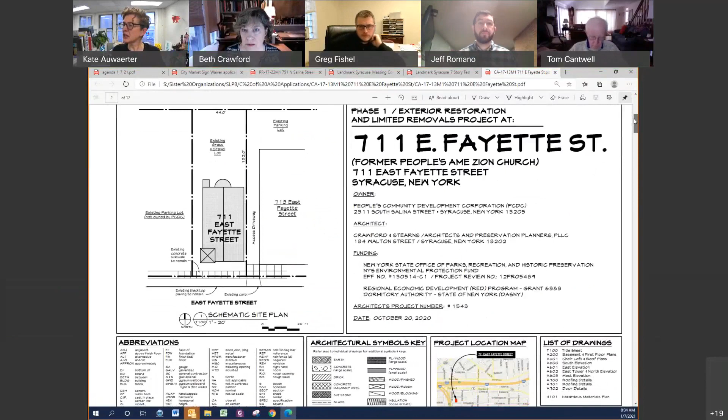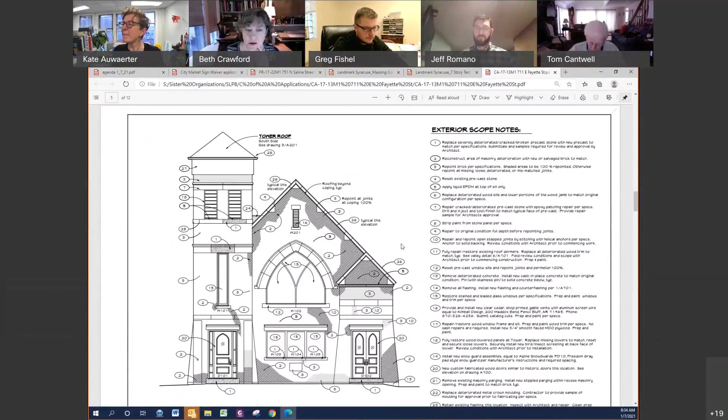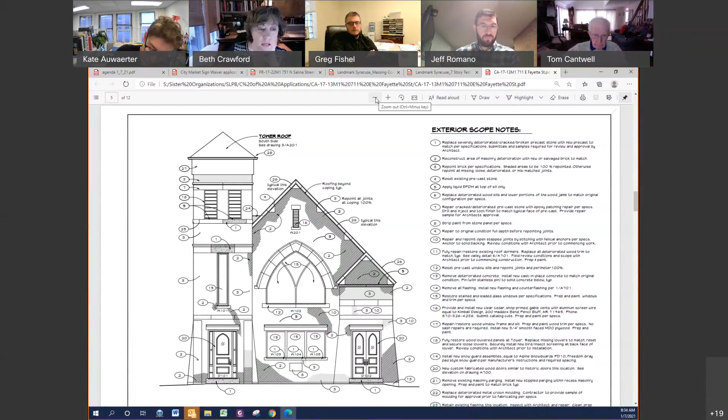So Kate, if you want to scroll down just to A600, which is the front elevation. So this is the front elevation of the building. This is a Charles Colton 1910 structure. One of the things that we did was make a modification to the roofing on the east side of the tower. So we're looking at an area at the intersection of the tower and the roof. There's a number 29 right there.

Then Kate, if you were to scroll to A602. There's a section on the left side of the drawing that shows the modification on the east side of the tower, which is somewhat obscured by the front gable. This is a problem at the building with severe water damage. Basically, the roof slopes down into the tower. It's just a really terrible original design.

So our proposed change on this is to shorten the masonry openings for the tower louvers and get all the water to basically run north and then back down around the side of the tower and off the side of the building. Right now there's a tree growing out of the area on the east side of the tower, and there's severe water damage in the tower due to this kind of just bad design.

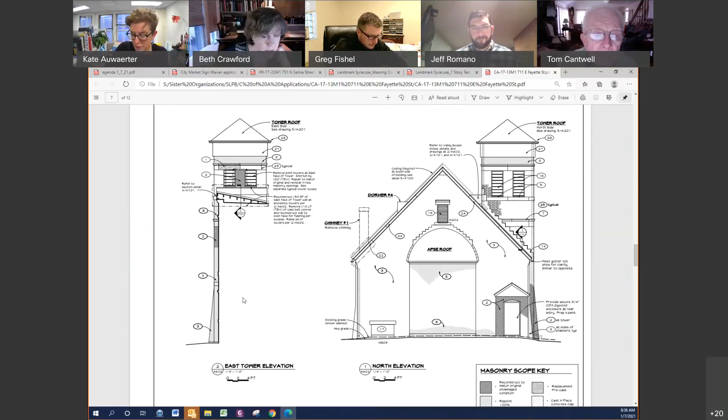So the first modification that is a change from the previous drawings that LPB approved is shortening the masonry openings and creating this new kind of valley at this location with appropriate flashing at the roof there and at the east side of the tower. And then the other modification is on A700, Kate. Okay.

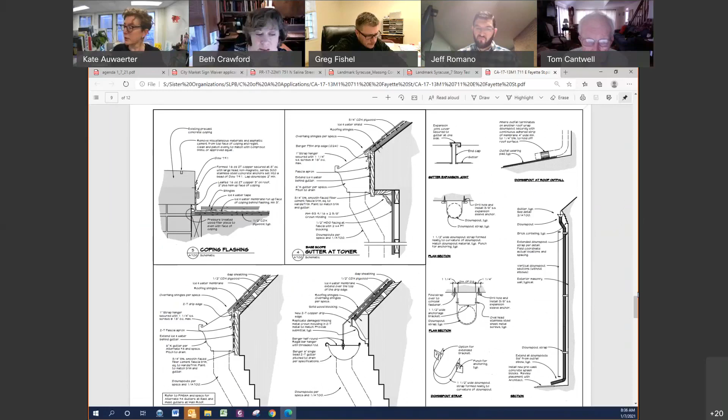So if you look at the far right side of the drawing, you'll see a pretty standard half-round gutter shown. If you look at the middle detail of 2A700, that shows the approximate historic condition with a metal crown molding on the building. The metal crown molding on the east and west side is pretty deteriorated. It exists fairly intact on the north gable.

The original proposal was to do half-round gutters on the building like this. They're fairly large, 6-inch. So this is the middle detail, 2A700, which is what the board approved previously.

I wanted a solution that would be stronger and a better solution for the church. I really felt that with the slope of the roof, this half-round gutter with snow and ice in Syracuse was not a good solution for long-term maintenance here. So I proposed this rather large K gutter. It's a 6-inch K gutter.

The crown molding on the K gutter actually emulates the metal of the crown molding on the 1910 building.

We have submitted this to the State Historic Preservation Office for review because this is an EPF project grant. They also have some other state money in the project, and all the work that I am proposing to LPB has been approved by the SHPO.

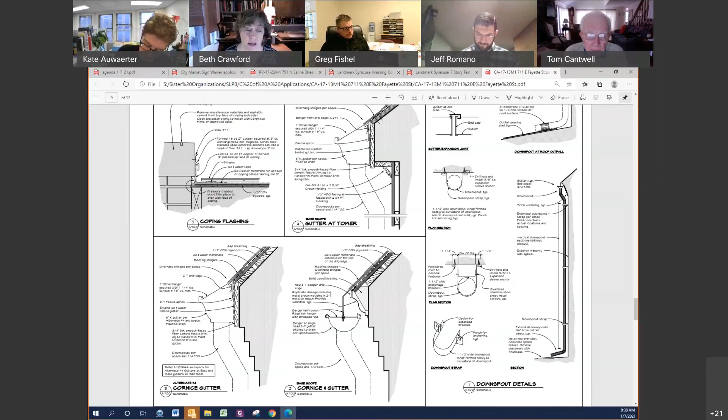I think those are the two main changes. I will note, however, that the bids came in higher than the owner's budget. We are currently working with Richard Gardner to come up with a budget that meets the owner's needs. We're working with Gene Egenhofer at State Parks to figure out both the MWBE and the meeting budget.

The work that is in these drawings, not all of it may be accomplished this year, but it is the owner's intent that it will be accomplished. They are looking at other grant applications. There's a grant application due next Friday for some National Trust money that they may be eligible for through some civil rights funding that the trust has available.

I think that's all for me. Okay, great. Does anybody have any question or comment? Any board members?

Thank you, Beth. This is a great project. I'm glad you're continuing on. I hope the budgets can be resolved. A small suggestion on my part regarding the tower flashing that is new that you described first.

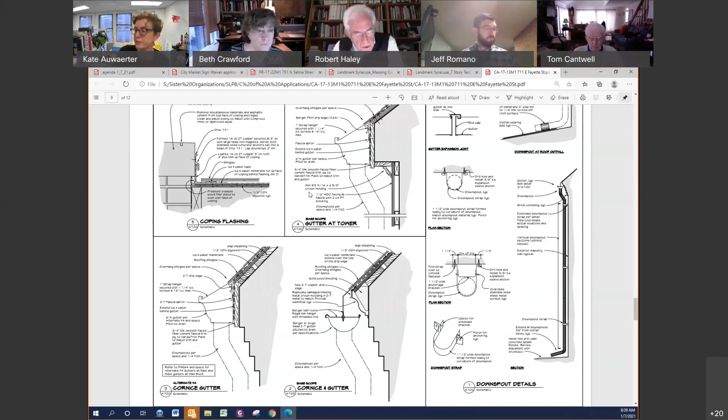Could the flat fascia of the triangle wedge be moved back to the inside edge of the masonry wall, still sitting on that, but move it back 6 or 7 inches so that it's not right on the face of the front roof.

Right, we do have it slightly recessed, and the intent was that it would actually be a dark finish so that it kind of disappears. But I will take it into consideration.

I think that is definitely a field condition once we can get up there. We were up there in a bucket about 2 years ago. I think you're right.

I would just suggest that it would be as least detrimental as possible if you moved it all the way to the inside edge, even the flashing not coming farther forward on the face of the brick, unless the field condition required differently. Move it back as far as you can on that masonry wall would be helpful.

Yeah, I see what you're saying. I understand. And once we get everything up there and removed, we can make some determinations.

Okay, thank you. Bob, can I just clarify? I'm still on the screen here. Are you talking about here, if you can see my cursor, are you talking about moving this back, or is it the?

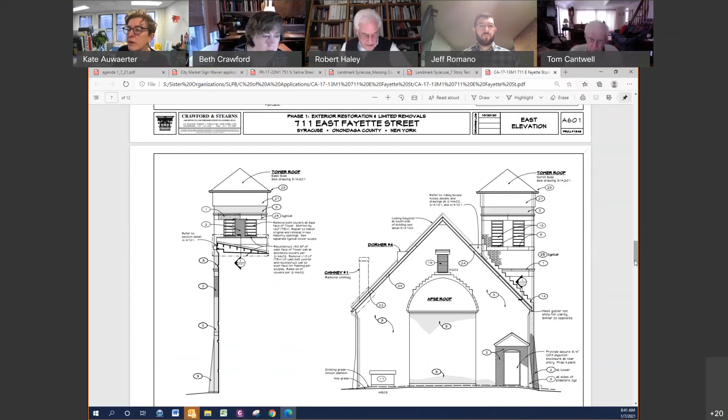I don't see your cursor, but it's regarding the detail on A602, detail 2, and the blow up detail is A701. All I'm suggesting is on that detail, on sheet A701, lower left-hand corner. There you go.

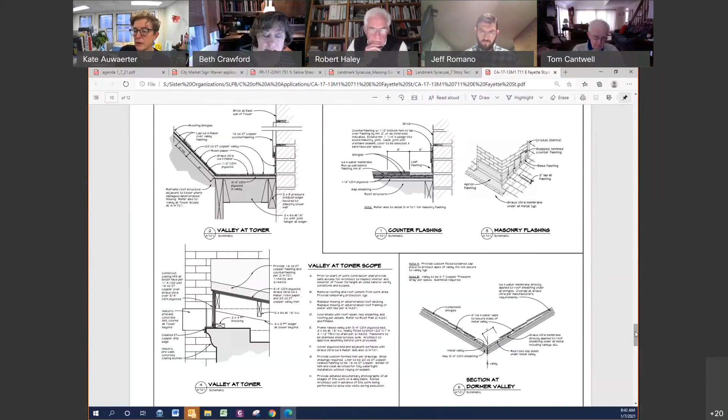Thank you. And if we can just go back to A600 again, where we started. You can actually see, approximately on note 29 next to the tower, this strange triangle shaped area. So it's perhaps smaller than we all think it is.

But we definitely need to look at that when we can get up there. Okay, that's great. If there's no other comments, I'd like a motion to approve.

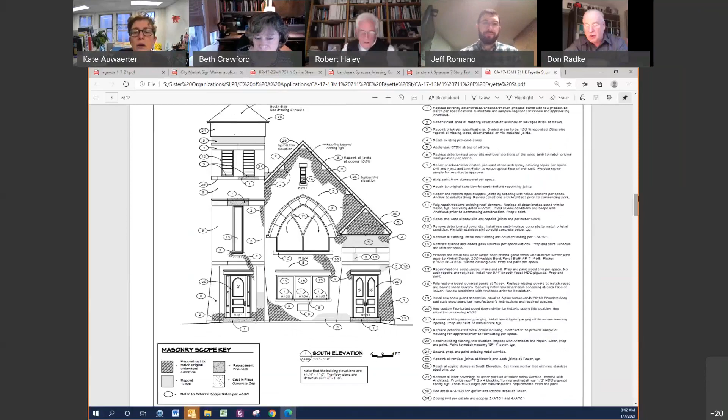Well, just one quick question, if I could. I wonder, tell us about the lintels, how you handle that, since they're a substantial part of the renovation. What are you doing there? Are you on the window lintels? Are they all new as I read, or didn't I read that correctly?

No, they're not all new. So this is a product called Onondaga litholite, and the board have come across this before. This is a very early kind of precast material that was actually made in the Syracuse area.

So on the windows, such as on the east elevation, your number one notes are replacing? Yes. Okay, so you've got brick shoring and then a new lintel, and that blends in flush with the face pretty much as the original condition?

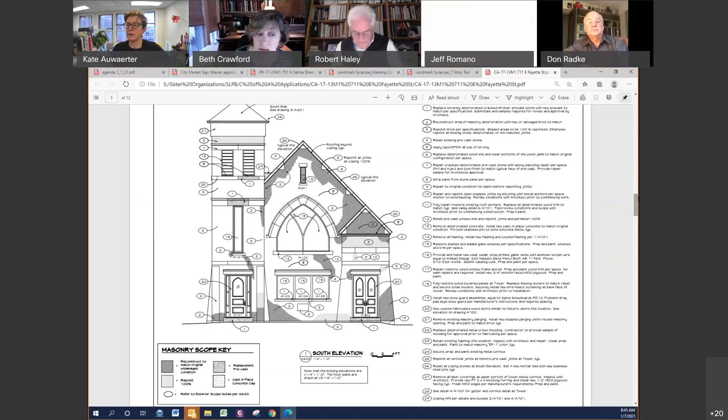At this point, we may focus as much of our efforts on the front of the building as a demonstration project. So we really want to get the roof on, get the flashing done, and then do the front facade.

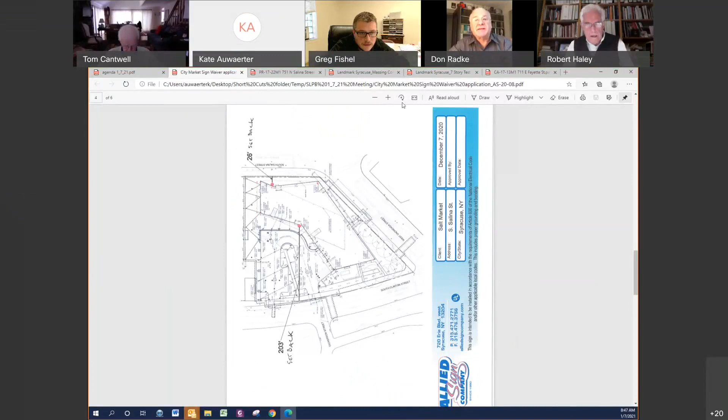I'll start with the slide. Here we go. I would ask everybody that if you're going to be rustling papers and turning them over, please mute yourself until you need to say something, because it's distracting. All right, Greg, I've started with a site plan. If you want to go to a different one, let me know.

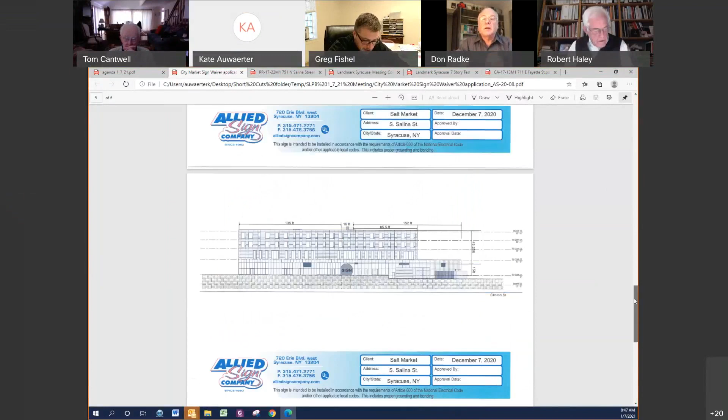Okay, so if we go to the diagram of the sign, what they're proposing is two signs here that are 15 feet tall by 16 feet wide. This would be a flat aluminum face where the letters are routed and backed with acrylic. It would be internally LED illuminated. This would be about a half-inch standoff where it would be halo lit.

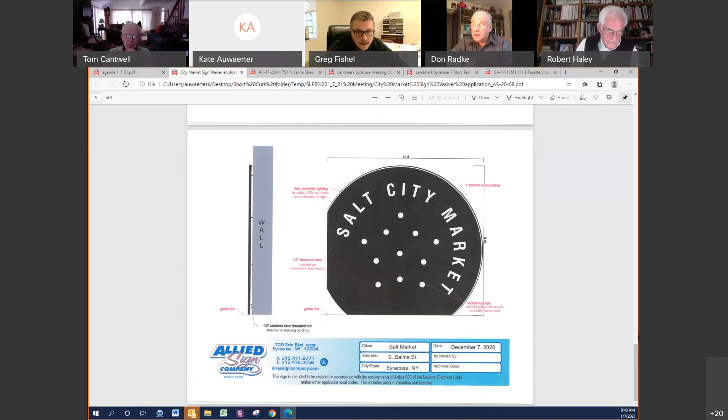So it's not glare lighting in your face. It's very subtle - the letters and these circles would light up and it would have a halo effect. These would be at each entrance on the map. I believe they're the entrance to the building, to the right of each one.

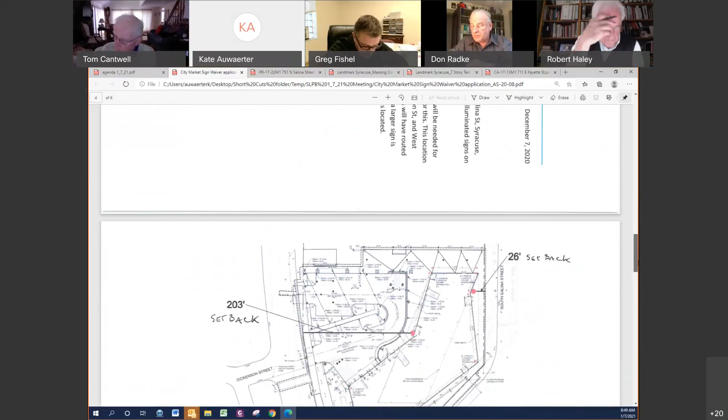I know it's kind of a modern looking building. They wanted to keep it low-key because it is in a historic district. These are pretty simple signs, black and white, very low illumination.

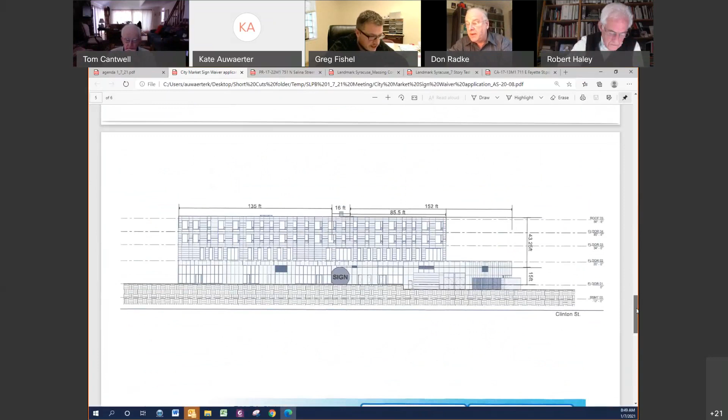Are there two signs or three? I'm a little confused looking at the site plan. There's two signs. One is on the south corner side of South Salina Street and West Onondaga. If you see the circles on the map here, that's where the two signs would be.

Do you see them on the site plan? Yeah, they're in red. So they're tucked pretty close to the building. Is that correct? How close are they to the wall?

They would be on the wall, but set off maybe a half inch to an inch to allow for the mounting. So these are actually applied to the building, not freestanding, not ground signs. They're wall signs.

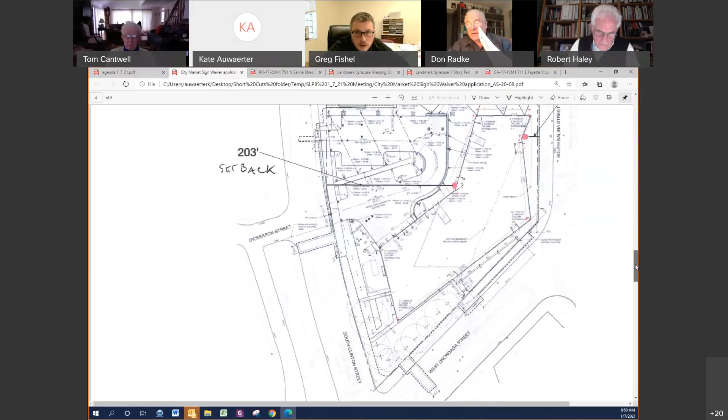Do you have any drawings? I just wanted to see what it was going to look like on the building. So they'd sit on the ground but be attached to the wall of the building. Okay, that makes sense.

Again, our jurisdiction is to comment. Are there any other questions or comments? Yes, I have some. Thank you.

Are there any other signs anticipated for the facade of this building? I don't believe so, that I know of for this building.

This is Maarten Jacobs, sorry I'm not on video. I'm the ownership of the building. Good to see many of you. There will not be any additional signage on the facade of the building, I want to clarify 100%. Thank you, Maarten, and your team.

I appreciate that, because commercial buildings with multiple tenants, that's what we're worried about here, the chaos that happens. We are trying to promote, for future new projects, a policy that deals with primary building signage naming as well as commercial signage, all part of the original design guidelines, so that it helps us approve individual applications.

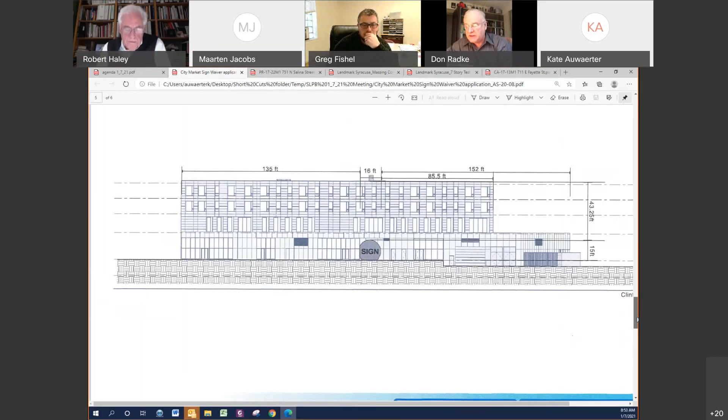Okay, so my understanding — let me flip this — I believe the issue here is that it's not the number, it's the size of the sign. So that is why they need the variance requirement, because of the size, not because of the number of signs being proposed.

That's all I can tell you. I believe the actual sign requirement that is allowed — this is larger, but not by a large amount. You know, I haven't seen the calculations for that.

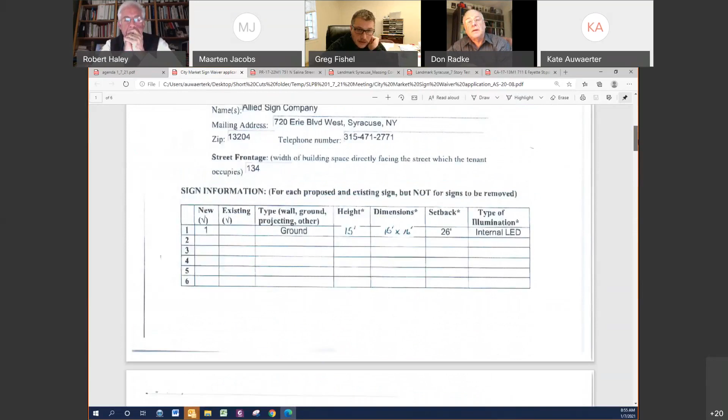I don't know if Greg can speak to that in terms of how much over these signs are over the limit.

On this discussion, I'd like to add these thoughts to the application. One is to document exactly how many square feet are in these two signs. And secondly, you just said roughly, what did you say, 25 square feet or something?

No, on the South Salina Street side, they have about 203.5 linear feet, and on the other side, 152 linear feet. What I'm getting at is it would be good for an application like this to identify the square feet of sign being requested and the square footage of signage allowable by the ordinance.

So we'd know the degree of change in granting the variance. That would be our recommendation. Yeah, that's something I should be able to provide you.

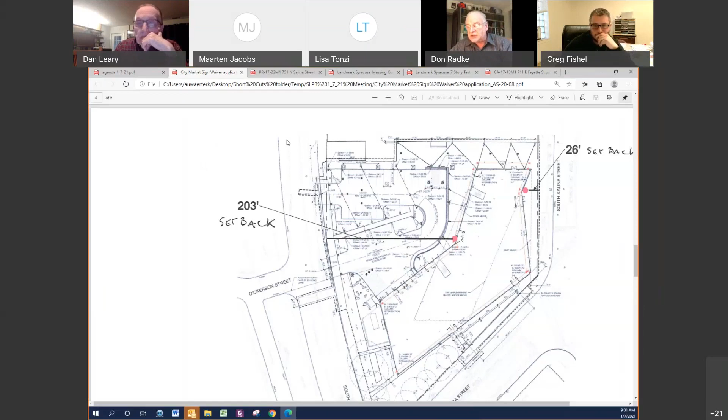Okay, moving on. Project site review, PR-17-22M1, 751 North Salina Street. Is the applicant here? Yes, I am. Michael Garrity, the architect.

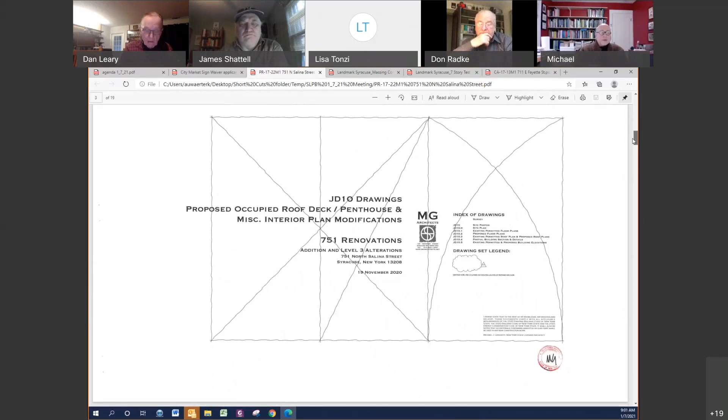Jim, floor is yours. Again, for the board, our jurisdiction here is to comment. What we've done is this building is under construction and nearing completion from a previous permit application issued about 2 years ago. At this time, for the front second floor apartment, we'd like that residential tenant to have an occupied roof deck at the rear of the building.

We have a 2-story, or 2-level, exterior porch structure from the original building permit, and that's been completed. It's a galvanized steel structure because, by building code, we couldn't do it in wood due to its adjacency to the property lines.

We're hoping to get our certificate of occupancy at the end of February so the base building structure is completed and approved. James Shattell, the owner, has an end-of-February deadline with the land bank to complete the project, which he purchased from the land bank. After that's achieved and spring comes along so we can work outside on the roof, we'd like to make the modifications to give that residential tenant a roof deck.

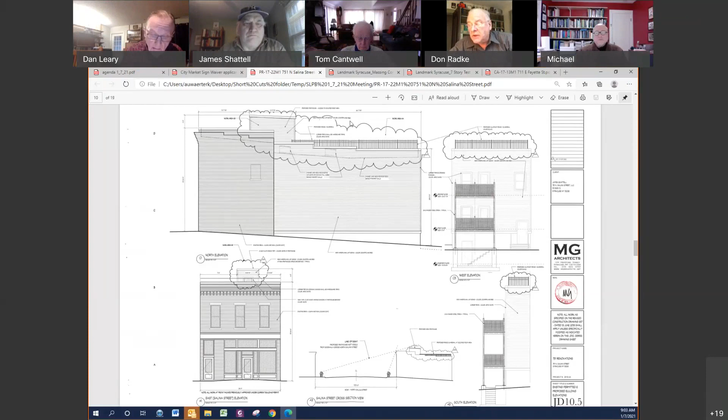Okay. What is the height of—I can't read it here. What's the height of the proposed penthouse on top of the existing building? Okay.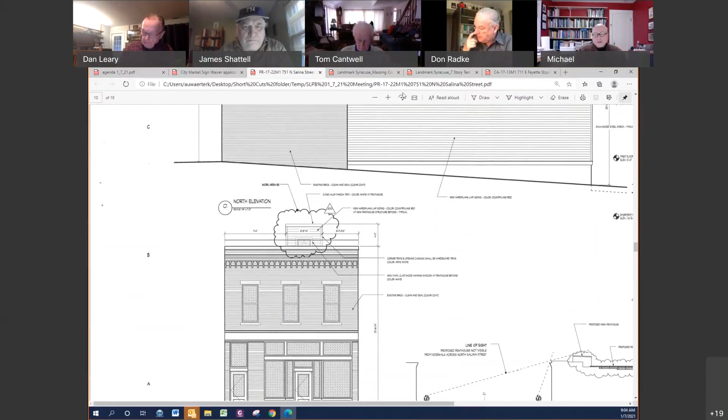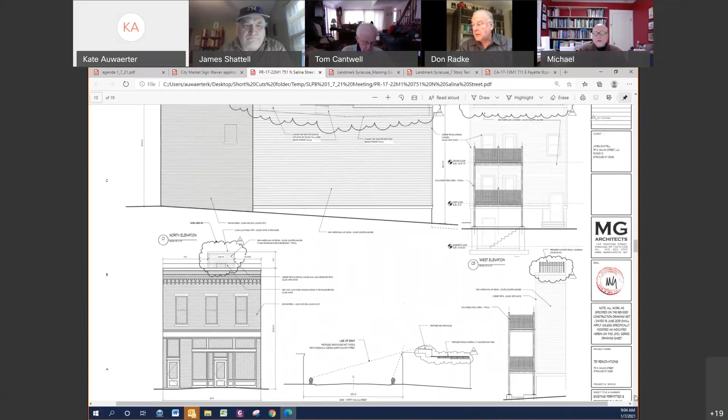I see a number here, but it's too small. Looking on sheet 10.4, let me pull up the front of the building, the front of the penthouse above the roof. 1.4—oh wait, I'm in the wrong scale. The drawing indicates 4 feet above the top of the cornice line from the front of the building. Is that what you were asking, Don? Yep.

And 7/8 inches from the front of the building as well. Yep.

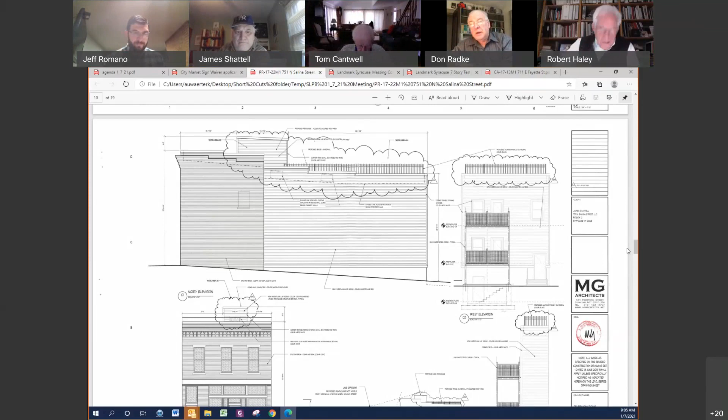I'd like to compliment your architect on showing the diagram of the setbacks, the A3 detail dealing with the view lines. That's very appropriate and shows you're on the right approach for the location of the penthouse. Thank you for that diagram. Thank you, Bob.

Any other comments? I'd like to say it's a nice set of drawings—very simple, very clean, very legible. I have no issue with moving forward with this.

Quick question: what is the color of the aluminum fence? Black. Thank you.

Don, can I say something quickly? Is this the building that actually had the emergency demo issued on it? Yes, yes. I just want to really commend the owner—I agree—James's work on this, and obviously your work, Michael, with James.

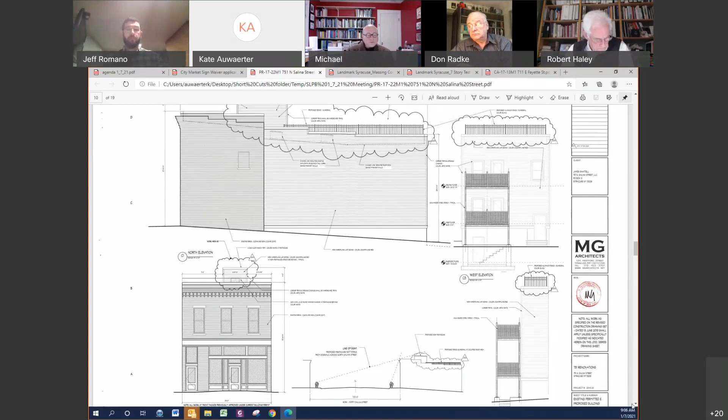This is a wonderful rescue, and in fact there's been some amazing work on this block. There was a recent article in the paper about another one of the buildings, and after the fire, seeing this work continue is really heartening. Absolutely, thank you for the work you're doing.

My sense from the board is that our comment is in the affirmative and positive toward this zoning referral. I would agree. I would suggest, Kate, you also add the last comment about the fact that this effort was made and saved the building from being demolished—that should be added here, just as you added it to our comments. Thank you.

The only comment—am I audible? Can you hear me? Yes. The only comment I want to make is that I appreciate the work the Preservation Board has done, and I definitely appreciate their comments and input on trying to preserve and even restore this building in terms of its original look, and the historic sensitivity you can help provide. Thank you very much, appreciate it. That's what we're supposed to be doing. So, thank you. Okay, great.

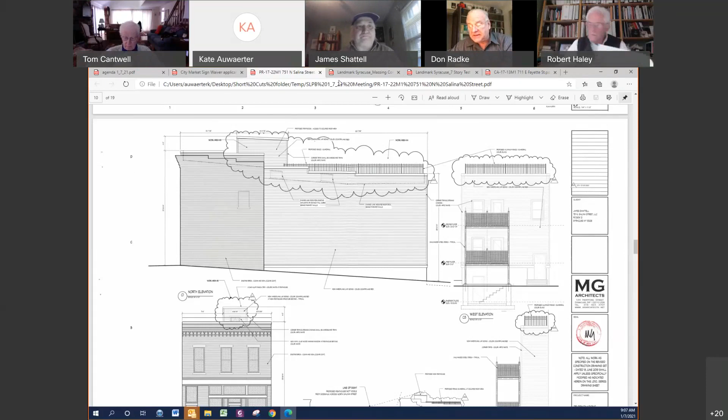Okay, the last thing on today's agenda is discussion of the new renderings on the Temple Concord project, the Temple project. Kate, could you put those up?

While Kate is working on getting those up, I want to note for the board's edification that this is not a formal C of A application. This is just the latest renderings provided by the department for us to view. What we want to accomplish right now is to give overall comments on the revision that will be going to both the developer and the BZA. I also want to let the board know we had a second discussion, a small group, and I tried to get different people from the board involved. One of the questions answered in that discussion is that with this revised rendering, it will still require variances from the BZA. That has not changed. So with that, I'd entertain any comment on these revisions.

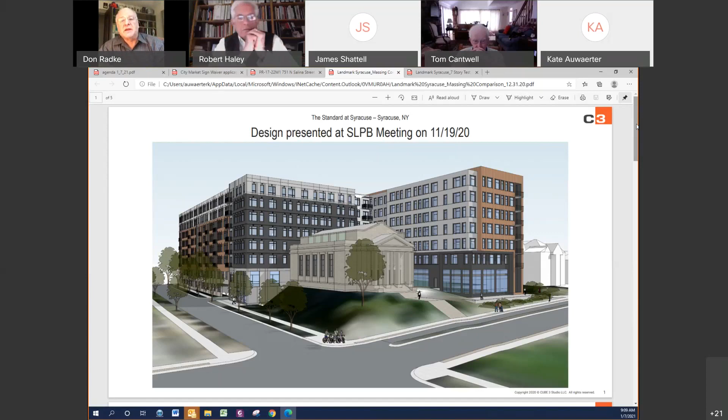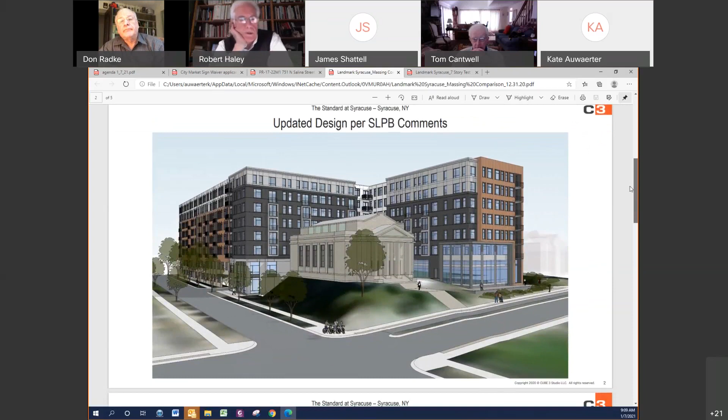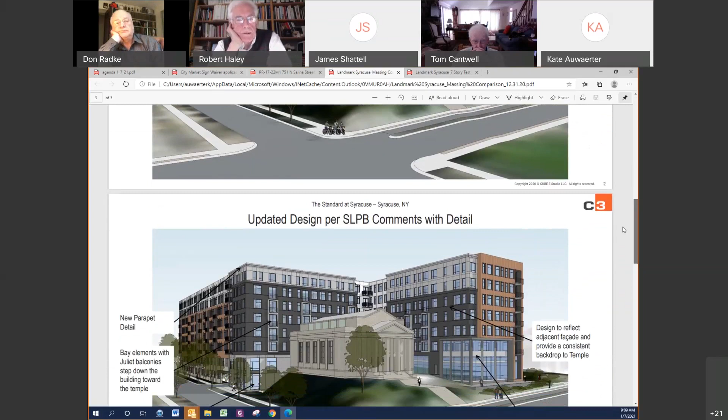Yes, thank you. Shall I start, Don? Sure, thank you. The revisions they showed were significant, and I only saw these as this packet came in. It showed response to our comments throughout the entire process regarding the scale of the project. These last diagrams are effective from two points of view, and I appreciate the design team's efforts in looking again at the historic context of the temple and historic elements of the temple design as informing their new addition. This lowering of the project's height is a significant approach — again, it's a hard decision for a developer to make.

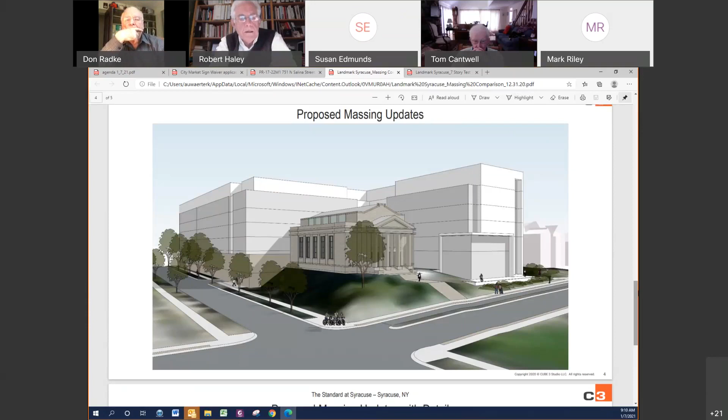An appropriate historic scale. Secondly, they added roof lines for the top floor behind the temple that mimic the setbacks of the temple design itself. That's a very positive point.

I'd also like to say that the rendering, although blocked out as a light gray volume, really shows how the temple sits in this corner presentation of the new building, and how much the new building's design should enhance the temple and be informed by it in terms of color. Lightness is appropriate. You can see how significantly different the project is rendered in this conceptual diagram, showing the temple as the significant form-giver in color and scale, and that this is definitely the right direction for the architectural team in terms of historic context, which is our primary view. We're not trying to design the project — we're trying to use the historical guidelines to inform the new project's goals for its success. Thank you. Any other board members?

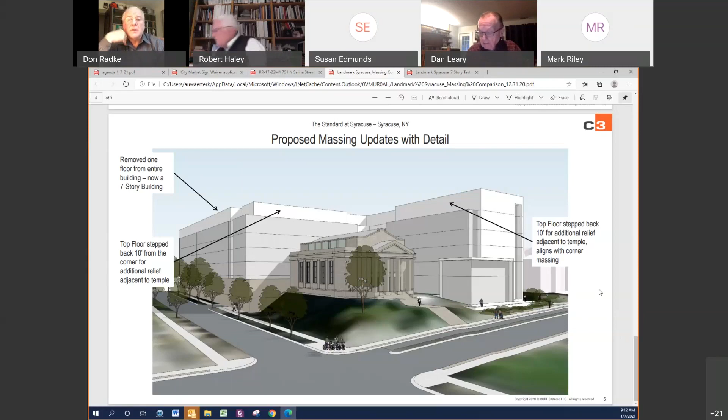I'm not clear because of the timing on this, and I did sit in on the task force meeting, but I'm curious — this submittal, which we've really not had much chance to review properly, is it intended to also address the SHPO letter?

The SHPO letter? The November 20th SHPO letter. I, the developer — we had talked about that, and this is what we got back.

Mark, are you there? Do you want to address that? John Harding — Don, this is James Trasher. I'll have John Harding from Cube 3, and we have Mike O'Shea from QPK on as well. So, John, if you want to jump in.

Sure. I don't recall exactly what the SHPO letter said, but I know we responded to a lot of the feedback we've gotten on this current design proposal. It responds to comments we heard informally and formally, and it reduces the building by a floor as noted, and steps back the top floor of residential units by approximately 10 feet from the main building face. We're going below grade with a level of parking, so there's only going to be — this diagram was done very quickly so it's not completely accurate — but we're reducing the amount of parking visible on the street side to only one floor on Madison Street instead of two. You can see that through the floor plans submitted as well. So there's a reduction in density, height, and scale, and we feel it's an appropriate response to the comments we received and to the proportions of the temple. I feel it's made a more prominent feature of the corner, as Bob said.

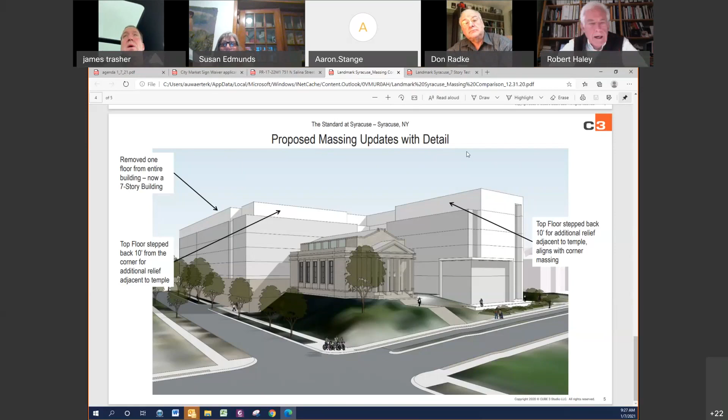We appreciate that comment from Ms. Edmunds. The landmark is extremely concerned with context, site context, and site impact. The discussion hinges around that primary resource, the existing resources, and your building and project is a significant part of that whole corner, that whole block. Context is critical. Certainly you are the public speaking to it. Your concerns as residents, although not by name, have been on our minds from the very beginning, even before this project was rendered, because we know the area well, and we're very pleased with the kind of school renovation that has resulted in your project. So site context is a very general, large category about the experience of the street, the streetscape, and the details are a huge part of this.

At this stage, we're in the very early stages of trying to support this project for the city and the developer, as appropriate as it can be for it to be a successful project. We're still in the process of advising for that, and the next step is the Zoning Board of Appeals. Thank you for your comments.

The only clarification I'd make is that it is not the LPB's position or job to support or reject the project. It's our job to comment. So we appreciate your input, and the next step is the Zoning Board of Appeals. It has not come before us yet as a final application. Thank you for your comments very much.